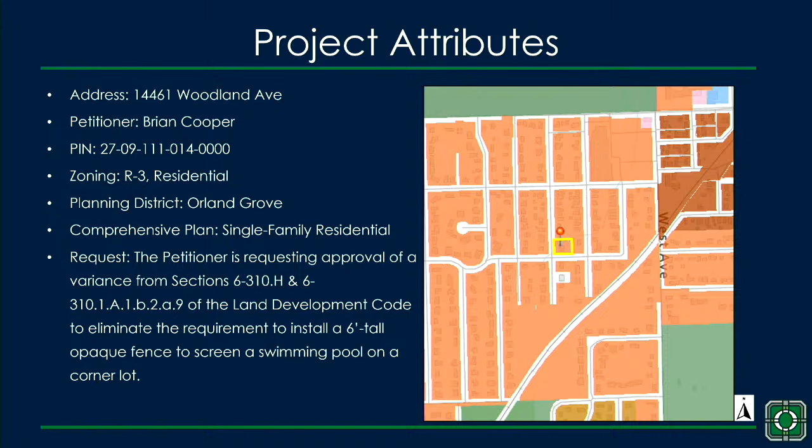The Cooper Residence Variance Project is a request to eliminate the requirement to install a 6-foot-tall opaque privacy fence to screen a swimming pool on a corner lot. The subject property is located at 14461 Woodland Avenue, within the R3 residential district, as indicated in orange on the map here. Under the comprehensive plan, this location falls under the Orland Grove Planning District with a land use designation of single-family residential.

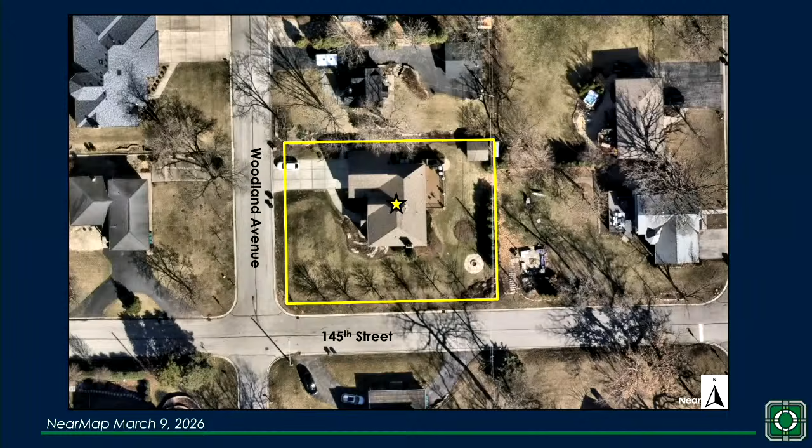Here's an aerial image of the subject property located on the northeast corner of Woodland Avenue and 145th Street. The petitioner has recently constructed a swimming pool in the rear yard of their property. Since this is a corner lot, the pool will be visible from the public right-of-way on 145th Street.

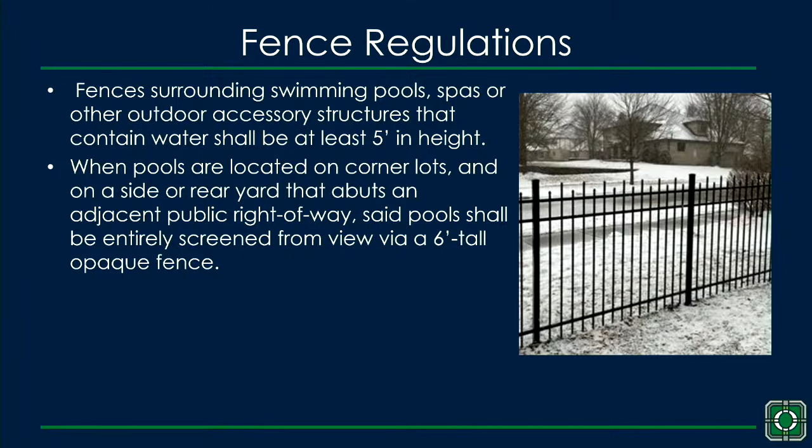As background, in 2021 the Land Development Code was amended to require a 6-foot-tall opaque fence to screen swimming pools located on corner lots. Swimming pools are permitted in side and/or rear yards of residential lots, and on corner lots the side and rear yards can be adjacent to a public right-of-way, making the pool more visible from the street. This requirement was implemented to screen the view of swimming pools from the public right-of-way.

The petitioner is requesting approval of a variance from the screening requirement, in which they propose to still install a 5-foot-tall open-style aluminum fence around their property in accordance with the swimming pool barrier requirements prescribed in the Land Development Code.

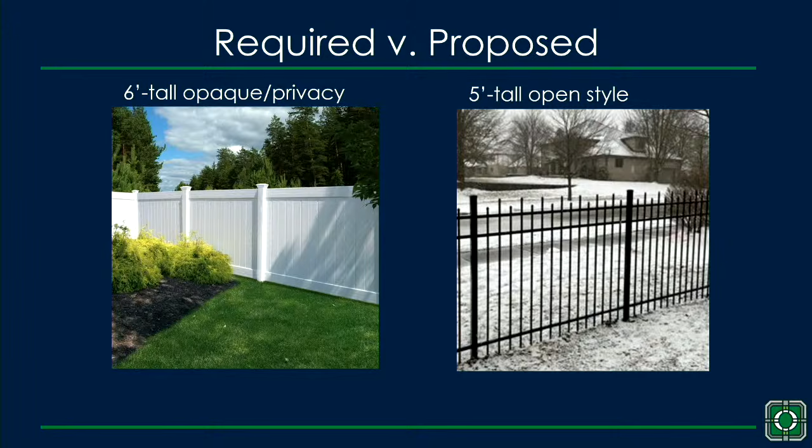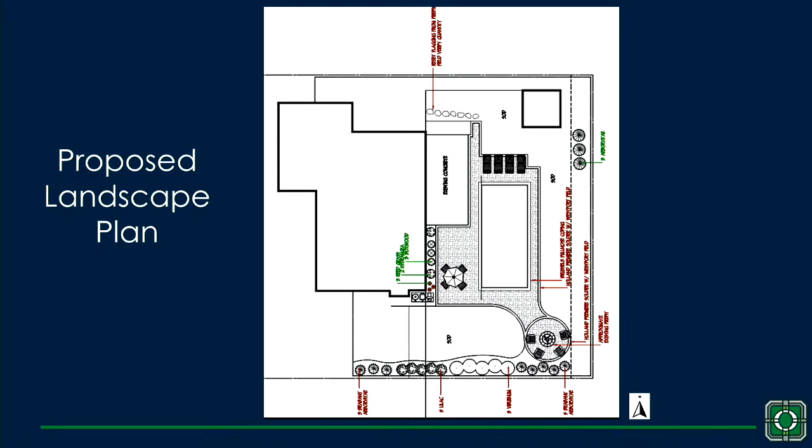As part of any variance request, the 10 variance standards must be met. The petitioner has responded to these standards, noting unique conditions to the property that make it difficult to meet code requirements, among other items as they discussed in their presentation. Their full responses to the standards are attached to the case file for reference.

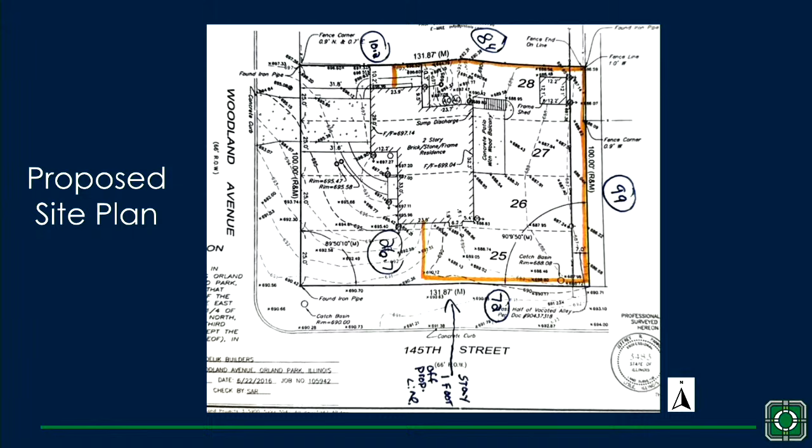And with regard to the opaque fence we're talking about, that would be only along 145th Street, correct? So the rest of the lot could be the other fence type, exactly. So it'd only be required along 145th Street and also the section connecting to their house on that side. Well, I'm very intimately acquainted with this particular lot and house. For 33 years I lived 4 blocks to the west, on the same corner. I had a northeast corner at 145th and Ridge. This is a northeast corner of 145th and Woodland.

The neighbor said that the picture shown from Google does not really adequately indicate the elevation difference adjacent to the property, and that's really true, you have to see it. There's a fairly steep hill that begins at Beacon Avenue, and you go one block to Highland, and the steepness continues from Highland to Woodland. So the Cooper lot is actually the low point at the bottom of that hill. Then that hill starts up a little bit as you go toward Rainey's Lane and Oakley and Woodland, or Westwood Drive.

Anyway, it seems there are 2 reasons we have these fence requirements. The first and most important is safety, and the fence complies with the safety requirement. The second requirement, added 6 years ago or whatever, is concerned just about aesthetics. So they meet the first requirement without a problem. With regard to aesthetics, they would have to install a fence probably 12 feet high to totally obscure the swimming pool from the street, which is ridiculous. So I have absolutely no problem with the request for variance.

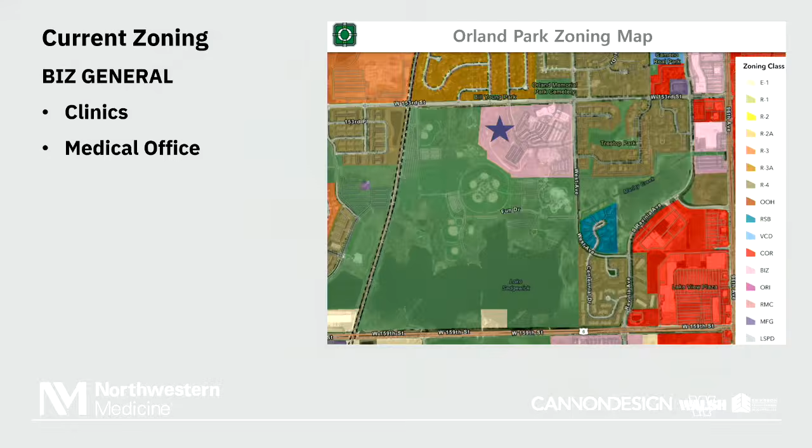Just a quick overview of where we are. Current zoning is business general, which is appropriate for medical office space. We're in the Orland Grove district. So just a high-level overview.

We're talking today a little bit about the site plan, some images of the building, talk about materiality, and then we'll transfer that to some of our civil team to talk about traffic, stormwater, and landscape. Our campus, you can see, the proposed building is just a little bit west of the existing Orland Park Northwestern campus and to the east of Centennial Park, just south of 153rd Street. We've situated the building the way it's located because we're nestled in between wetlands and some natural native wetland areas and landscaping that we're trying to preserve as part of this project.

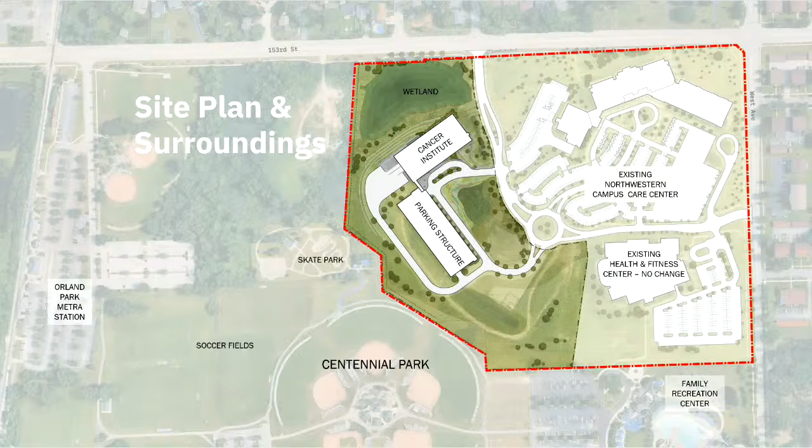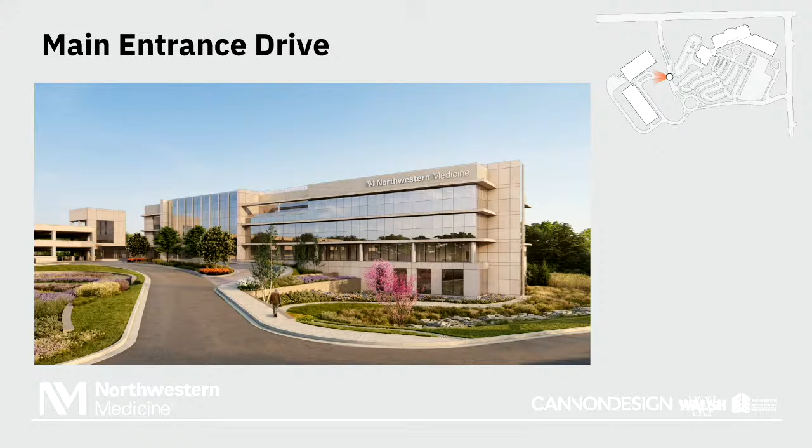So that's kind of where the building gets its shape and orientation. You can see from when you approach it from the south, we're trying to create a very welcoming destination look to the building - a lot of welcoming glass, along with some masonry and stone elements to balance the openness of the glass with some more solid things rooted to the community and anchored to the site. Borrowing from prairie aesthetics as well, with the strong horizontal lines and the brand of Northwestern, trying to merge all those things together. To the left, you can see the parking structure that's attached on the first story so that patients can come through a connected place into the parking structure without having to cross lanes of traffic.

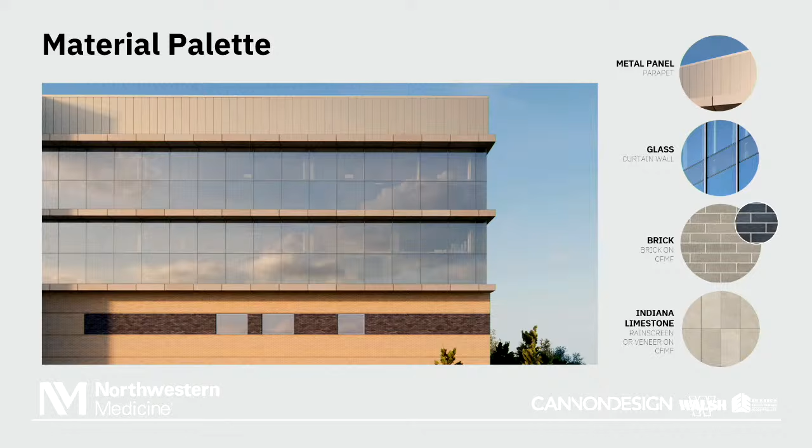The materiality we were discussing—we're using a lot of brick as well as Indiana limestone, so brick masonry is very prevalent throughout. We have the large glass curtain wall elements, which are aluminum and glass pieces, and then metal panels for the black area to screen the mechanical units on the roof.

Here's another view a little closer to the building. You can see a lot of the stone, a lot of the glass. That's the main view of the building with the stair tower, but we're trying to blend the heavy with the light and get a nice play and interchange of materials, as well as great landscaping in front of the building to help soften it into the landscape.

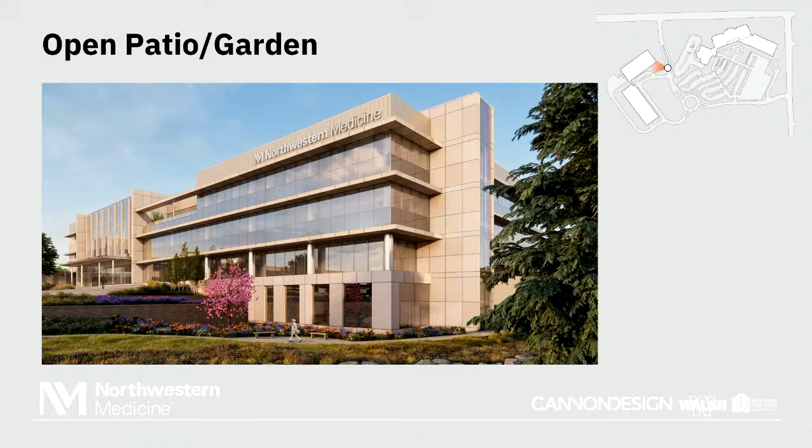Another view looking from the south along the edge of the parking structure—we're screening that with a lot of landscape elements to help soften it as well. And the detention space in front of the building, seen to the right, will be fully planted and look nice year round.

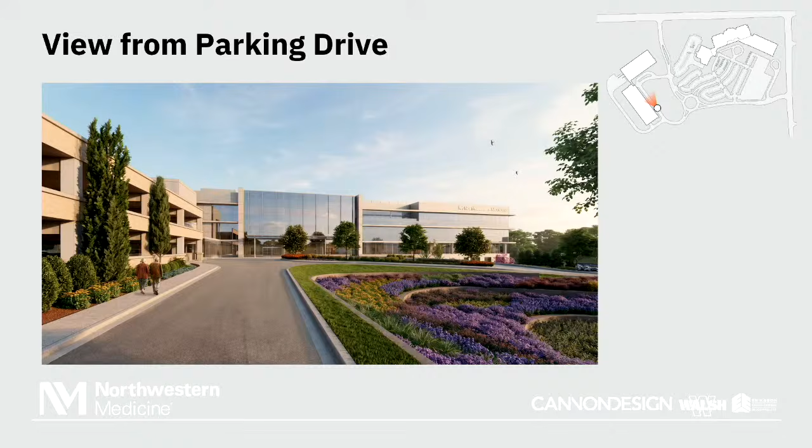This looks towards 153rd Street. The lower levels, to Dan's point about cutting edge technology, a lot of that space doesn't need windows because it's the radiation oncology spaces—big giant vaults that help protect patients and the public from radiation. So that's a lot of solid elements, all the brick masonry pieces. Above that, lighter—which you'll see from 153rd Street—is where the glass will be more translucent and transparent at night, so it'll glow like a beacon on the landscape.

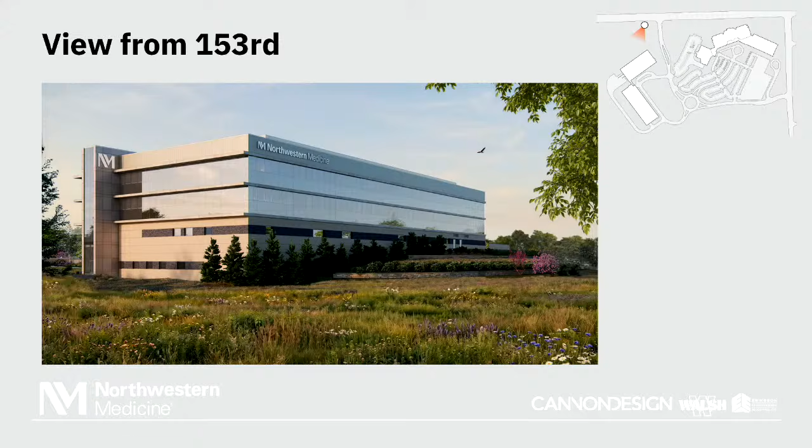Is that western view your parking lot? No, that's facing Centennial Park. That's kind of the service yard area. Yep.

So for the traffic access demo, I'm going to turn that over to our civil engineering friends.

Good evening, my name is Steve Corcoran, Director of Traffic Engineering at Eriksson Engineering Associates. We prepared a traffic and parking study that should be in your packet, but I'll give a very brief overview.

In terms of the campus, we're going to use the existing campus access off 153rd and West—that's going to remain the same, no major changes. We'll do a little restriping at the 153rd entrance to extend the left turn lane there, but we'll use that same entrance.

We'll have 2 access drives into the building area. One is from the roundabout—if you recall, at one point there was a temporary parking lot during reconstruction of the medical office complex; that was the south entrance. Now we're making that a formal south access into the parking garage area. We'll also have the main entrance, shown earlier, located opposite a driveway for the medical office building. So we'll have 2 ways in and out leading into the parking garage.

At the request of staff, for inbound traffic we're going to direct, with signage and through literature, our visitors to come in the 153rd Street entrance. In terms of parking, we have a 490 space parking garage that will serve both visitors and staff. That demand and supply figure was based on parking studies done at other cancer centers around the country.

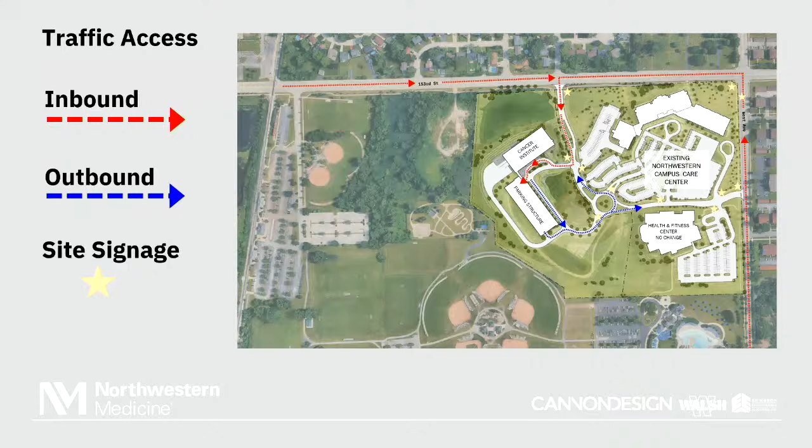And now I'll turn this over to Rick Sinnott to talk about stormwater. Good evening, my name is Rick Sinnott, S-I-N-N-O-T-T, with Erickson Engineering, and I'm the project civil engineer.

This site was somewhat of a challenge to grade—I'm sure you've seen it. It has a low area right off 153rd Street and a big hill just south of that. So our intent is to grade the site to provide stormwater management in accordance with the village and the MWRD requirements. We created a series of 3 detention ponds.

The first one, number 3 on that slide, is existing—it was built as part of the 2016 project. We're going to keep that, at least temporarily. It will probably be modified at some point in the future, when the area to the southeast of the roads is developed. There's no development plan for it now, but there could be in the future.

So Pond 3 could be enlarged at that time. Pond 3 is then tributary of Pond 2, which provides most of the stormwater management for the site.

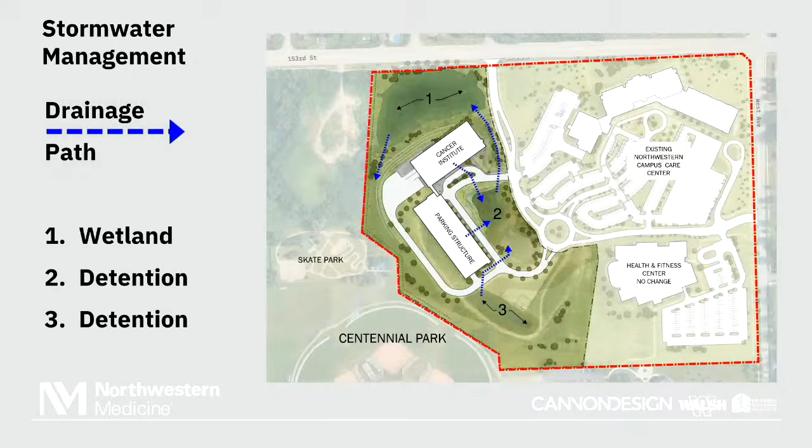We are in the process of applying for a permit from the county as requested by the village. The existing wetland encroaches onto 153rd Street, so there's a potential impact to the 153rd Street right-of-way. There's no impact to the street at all, but since that's the county's right-of-way, we have agreed to submit for a permit to the county.

This is an alternate if the county doesn't allow us to do the plan that we have designed. This first alternate would be to do some grading in the right-of-way to pull that wetland away from the right-of-way.

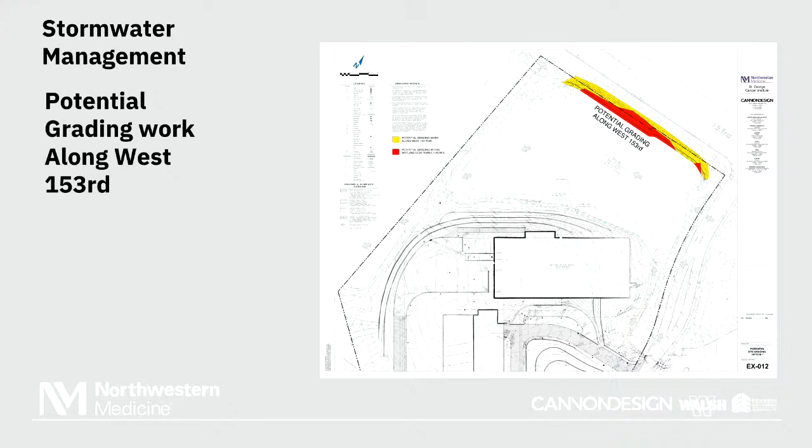And then there's a second alternate that if the county doesn't allow us to do that, we will take Pond 3 and enlarge that to provide the detention that we're not providing in Pond 2.

So that's the scheme, and I'll be available for questions. Thank you. Anybody else?

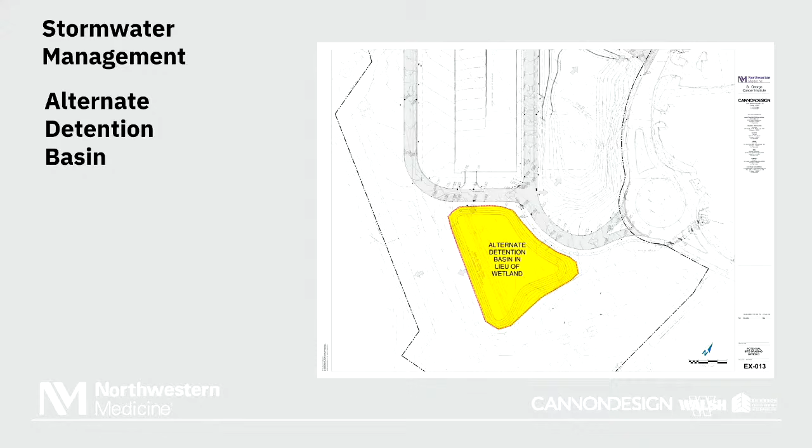Yes, hi, my name is Steve Gregory. I'm a landscape architect with Erickson Engineering, landscape architect for the project. We're super excited to get to work on this one because it's a pretty unique site, as Rick described, with the grading and the wetlands that exist there to the north.

Which we're going to be able to keep and basically enhance. We wanted to use that as kind of the framework for the planting and for the native plants and the introduction of low profile prairie for the bulk of the site.

There's a small perimeter around our paved areas where we have a low maintenance turf grass, just for a transition from the built environment to that more natural environment with the native plants. The basin bottom would be done with wet tolerant native plants.

All this would be governed by a monitoring and maintenance plan. We're currently working with staff to make sure we accommodate all those issues and items, so that we will have a monitoring and maintenance plan that's compliant with your ordinance.

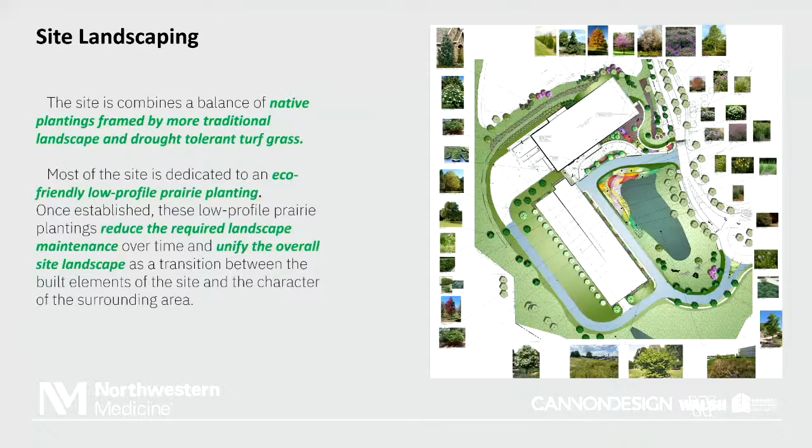Next slide. This kind of just shows you a little bit more in depth. That area that was in the renderings there on the right is the patio and garden, kind of nestled in up next to the building, offering a unique little setting there, surrounded by a pollinator garden.

Where we're going to introduce a bunch of native plants that would allow our staff and or any patrons to use this space to just relax and enjoy their time between shifts or whatever it might be, in a more natural setting.

Overlooking the dry creek that Rick had mentioned, that basically is a link between Pond 2 and Pond 3 -- Pond 1, I'm sorry, it's the other way around. Pond 1 is the native area coming from Pond 2, where all of our water goes first, part of the treatment train, and then would go through this dry creek area.

And that's done to kind of just stabilize that so we don't have erosion or anything else there. And then again, it will be framed with native plants that lead down into the native plants of the wetland area. I will be available for any questions, but that's pretty much our landscape plan in a nutshell.

Happy to answer any questions you might have as we move forward. Thank you for your time. Thank you, sir.

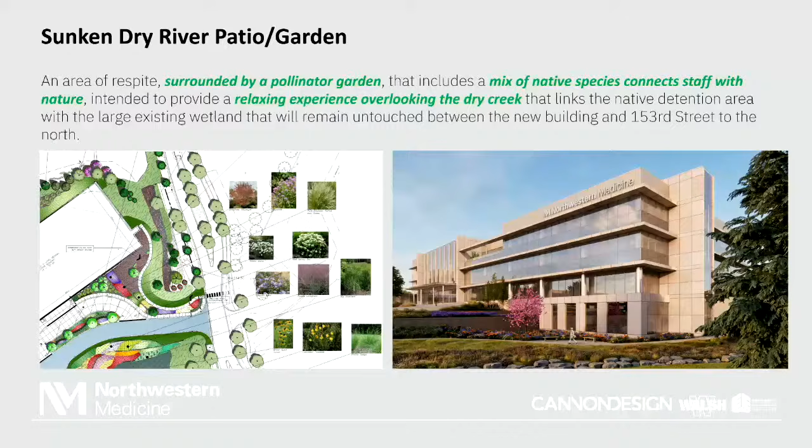Ryan Soderquist with Cannon Design. I'm the project architect for the project.

We do have a couple of special use permits and modifications that we are asking for the development, starting with the amendment to the existing PUD. On this screen, you'll see the 2016 plan, the last time the campus had a project, shown in dark gray on the left image. You can see where our lot is off to the left—it didn't include the entire property. So the amendment is to bring that lot 3 property into the PUD.

There are no modifications asked for the fitness center. The Village Fitness Center is on lot 2, and nothing we're asking for in the development would affect that. There's really one condition that Ms. Gorman will talk about, for an update to the current campus on Lot 1.

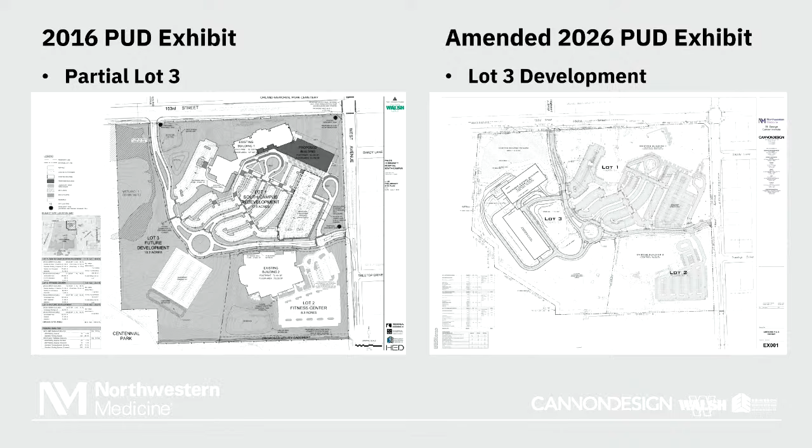The second special use is to have our building within 30 feet of the wetland. You can see a 50-foot, 30-foot delineation, and then the zero hatched area is the wetland. Essentially, the special use lets us align the building with the wetland, which lets us optimize the land and the footprint of the building.

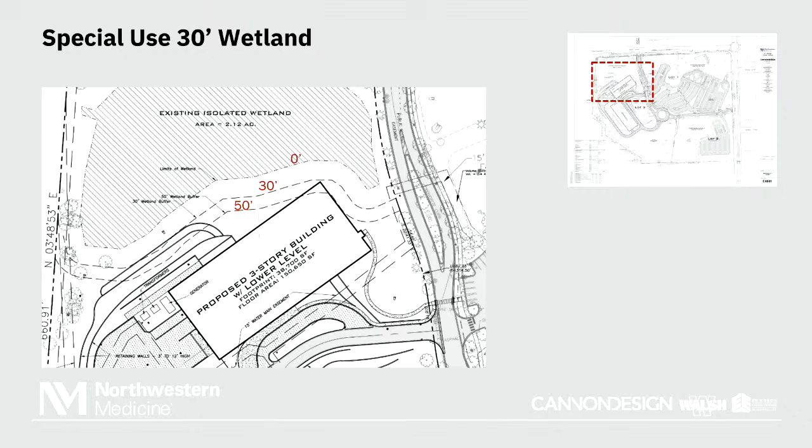Moving on to modifications: current ordinance allows a 4-story structure in the business district, which we are. The height limit is 50 feet. As Andy was mentioning, our first 2 floors are brick and have the heavy equipment, so the floor-to-floor heights for the linear accelerators and imaging equipment need to be a lot higher. We're really only asking for 1 foot 6 inches over that height limit, so we're keeping it as low as we can.

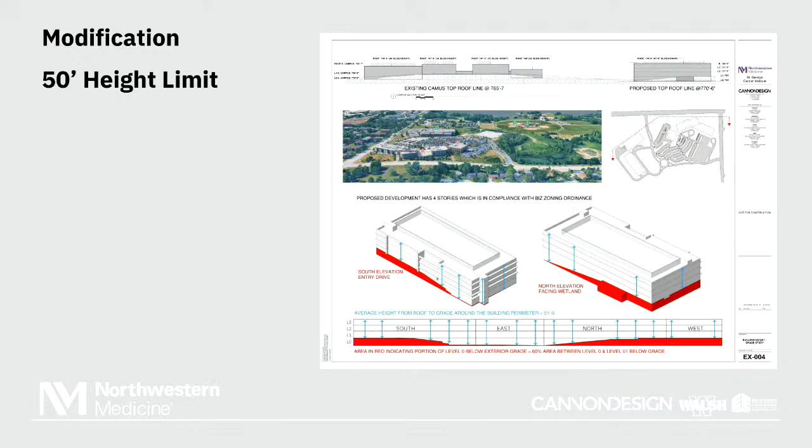But by noon, and then in the evening, at no time will the shadow of the building end up on 153rd. It will not go on the sidewalk on the south side of 153rd, and it will never reach the properties across to the north.

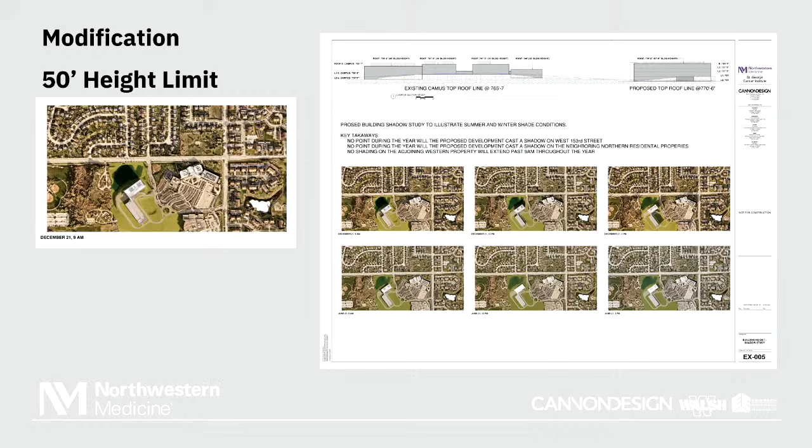We also have a modification regarding mechanical screening—the ordinance calls for a height limit of 10 feet, and we're requesting a 1-foot addition. This is because a lot of the equipment for imaging, the cooling units on the roof, are a little higher, and we don't want those visible from the road on 153rd. So it's a slight 1-foot increase to ensure we're screening all the mechanical units on the roof.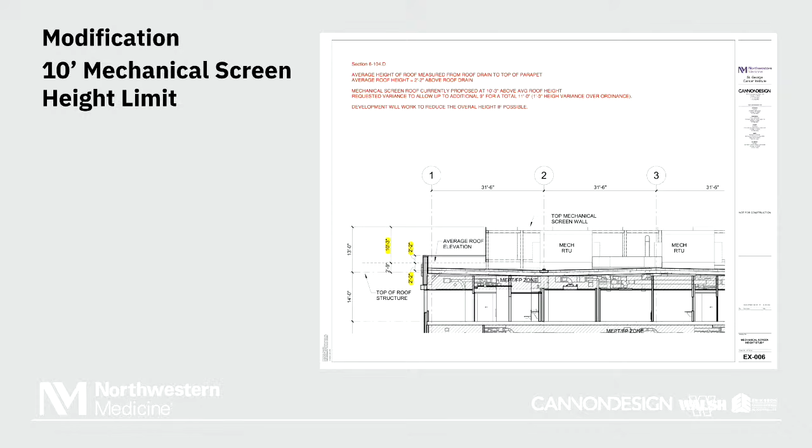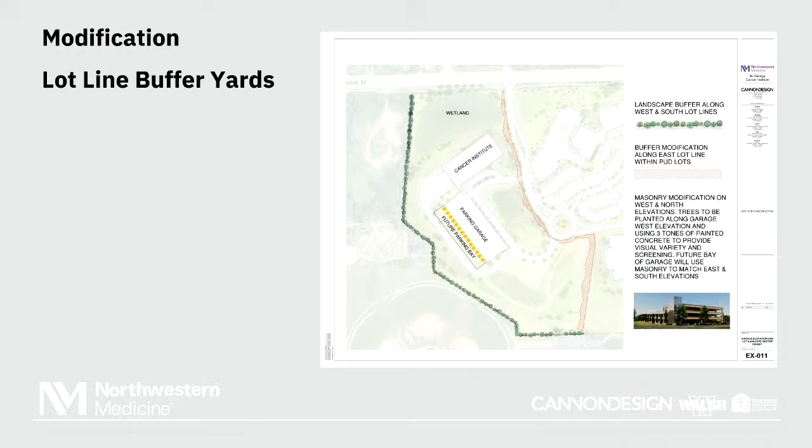So then the last modification I have to talk about is on our parking garage. The ordinance calls out for masonry on all four sides of the buildings. As Andy had shown with the Cancer Center, we do have a lot of masonry. We have Indiana limestone as accents that comply fully with the spirit of the ordinance. We are on the east and south side of the garage, we're going to have brick inlay and concrete panels, so the masonry ordinance does comply on those two.

However, as I mentioned, we're leaving some space in lot 3 for future development, a future bay to be added onto that parking garage. So the request for the modification is that, in lieu of having brick on the west and north facade of the garage day one, we would do landscaping and a painted concrete in an assortment of colors to give it some variety and not just be plain, as it will be seen from Centennial Park. But we will do fast-growing trees to provide some screening.

We also have the buffer that's going to be between Centennial Park and our building. Then at a future date, when that extra bay of parking gets built, we would go back and do the matching brick all the way around. So in the short term, we're doing our best to come up with something visually appealing for the community, but in the long term it will all come under the ordinance.

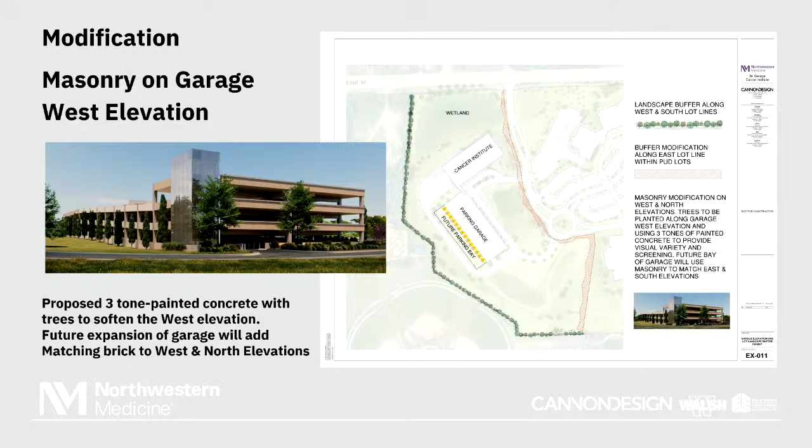So with that, I will hand it back to Dan. Well, thank you for that detailed explanation. Thanks, Ryan. We're almost done, I promise.

The last thing we're going to touch on is economic and community benefits. The expansion of cancer care and treatment in Orland Park, we talked about that, not just for the community, but it being a destination in the Midwest and even nationally, we really believe it's going to be bringing people and business to the area.

Approximately 150 new jobs are what we're estimating generating in the facility. That's not moving people from one place to the next, that's 150 new jobs created. And at any given time, we think we're going to have 350 construction jobs generated for the 2+ years we're going to be here, looking to open this in mid-2029.

Landscape enhancements that we just talked about, it doesn't even do it justice just to see it, but it's going to be beautiful, a gorgeous facility. And then preservation of the existing wetlands already there, and overall beautification of the Orland Park campus, which already is a beautiful modern campus. So priority for open spaces versus parking lots as well, that's why we have the parking deck, and we're going to have as much open space as we can.

In a nutshell, we think it's going to be great for your community, and we thank you for your time this evening, and definitely open it up for questions. I'm sure you have a lot. Thank you for your time.

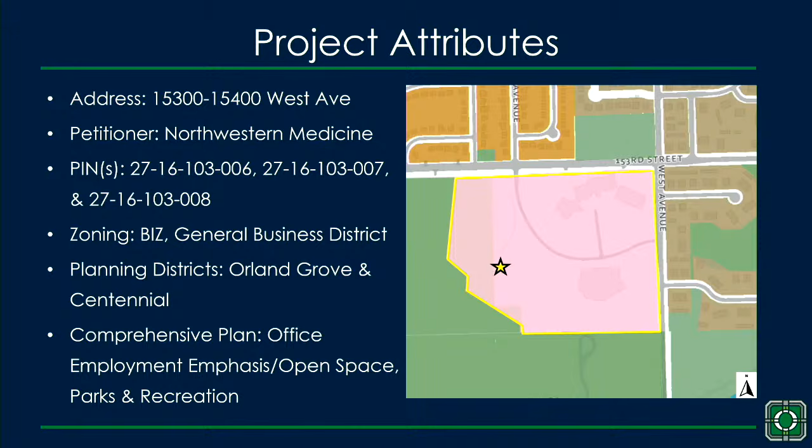I'll keep it a bit more brief since our petitioner had such a thorough presentation. I'll go over our requested approvals again. Here's the full list: it includes an amendment to a special use permit for a planned development with modifications, a special use permit for development within 50 feet of a non-tidal wetland with modifications, and approval of their site plan, landscape plan, and building elevations. I'll go into more detail with their modification requests throughout the presentation.

I'd also like to note that the Palos Health and Fitness Center will not be impacted by this proposal. The proposed development would occur entirely on the vacant parcel of land adjacent to the center.

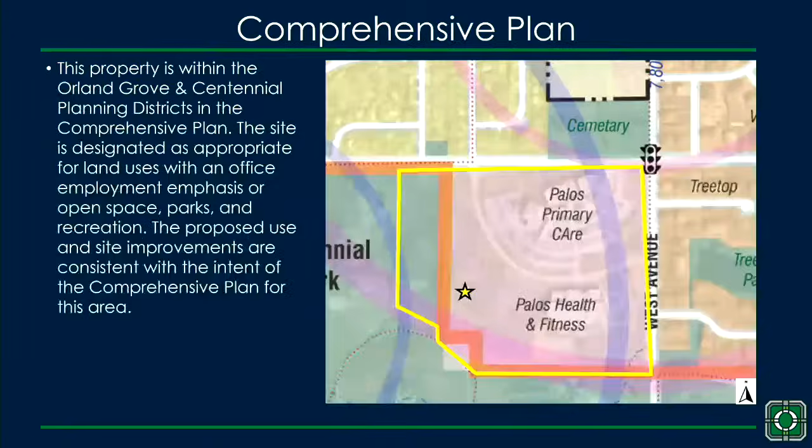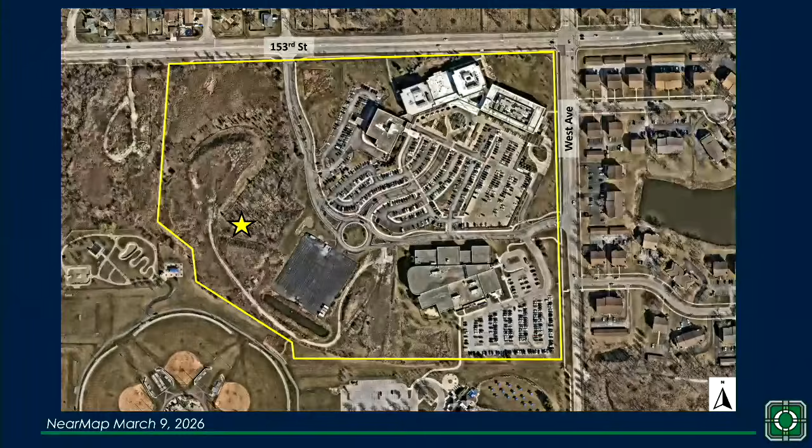This is an aerial image of the subject property and surrounding area, and the yellow outline indicates the entire boundary of the planned development, known as the Palos Community Hospital Planned Development. This includes the existing medical offices for Northwestern Medicine and the Palos Health and Fitness Center.

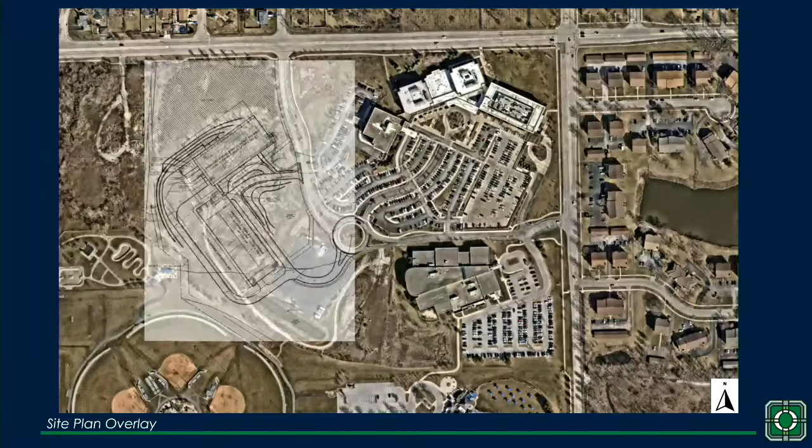Here's the proposed site plan overlaid onto the aerial, just to demonstrate the location of the development relative to the existing buildings. Moving forward, here is their proposed site plan. As discussed, this will be a 3-story, 150,650 square foot medical office building, accompanied by a 4-level parking structure.

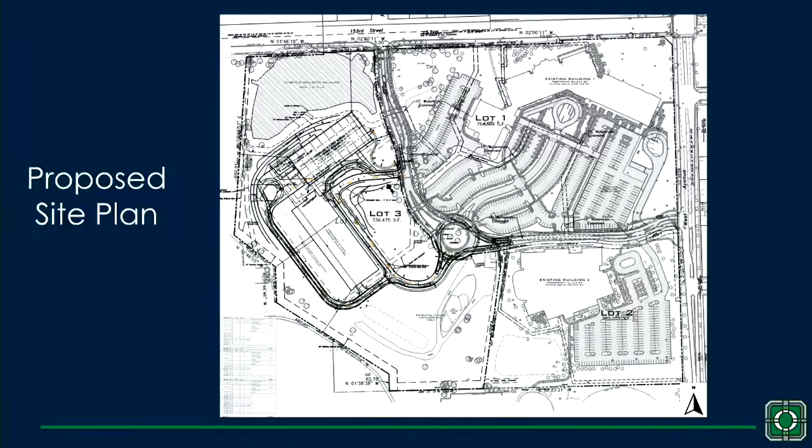There's approximately 2 acres of wetland on the north side of the property, proposed to be utilized as stormwater detention for the development. Overall, the site plan meets land development code requirements regarding setbacks and lot coverage. The proposed lot coverage is approximately 49%, which is far below the maximum of 75% allowed for this district.

The parking for the site will be accommodated within the new parking structure, proposed for a total of 490 parking spaces, including 10 accessible spaces. However, 753 spaces are required by code. So parking will be shared among all uses within the planned development, as demonstrated in this table shown on the slide, as well as within the staff report. The shared parking lowers the deficit in parking below the 20% threshold warranted for administrative relief, so the parking requirement has been considered to be met by staff.

The code requires that a public sidewalk be installed on both sides of private streets. The petitioner has stated that the existing wetland on site makes it difficult to meet the sidewalk requirement, as this would require the wetland to be disturbed. There are also existing trees that the petitioner would like to preserve, which would have needed to be removed to accommodate a sidewalk. So the village has been working with the petitioner to address this requirement, and staff is recommending a condition of approval that the sidewalk be installed at the time of future development on the site.

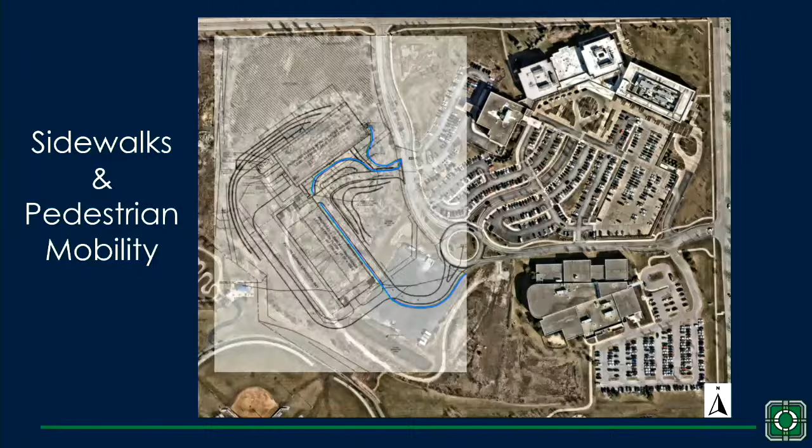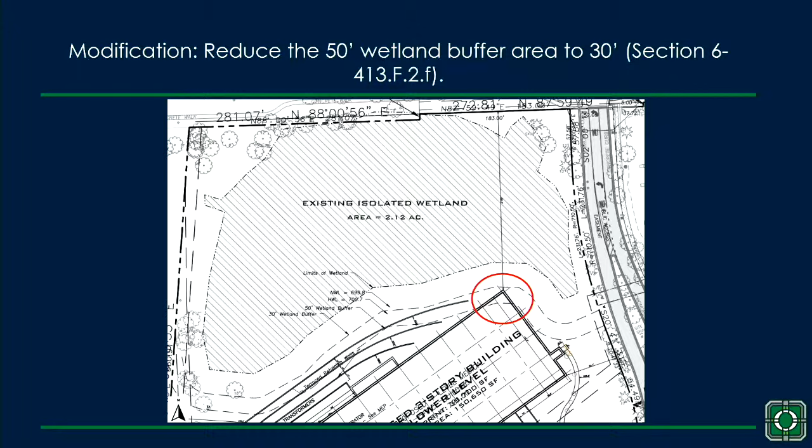Due to the proximity of the wetland, a special use permit for development within 50 feet of the wetland is required, and the petitioner has further requested a modification from the code to reduce the required 50-foot buffer to 30 feet, as the northeast corner of the medical office structure encroaches into the required 50-foot buffer, as shown in this image. Staff is in support of this request due to the minimal impact.

The preliminary landscape plan has been reviewed by the village's landscaping consultant. The plan has been conditionally approved at this time, with staff recommending conditions of approval for landscaping to be addressed prior to the petition advancing to the Board of Trustees. These items include stormwater management area landscape, the west and south landscape buffer yards, a monitoring and management plan, and landscape cost estimate.

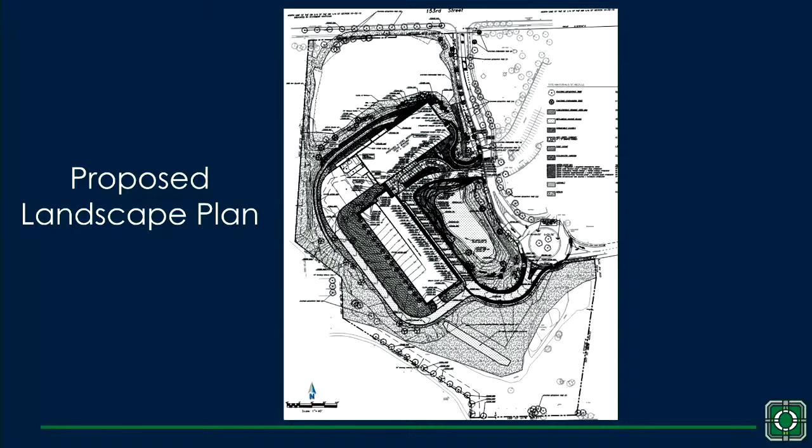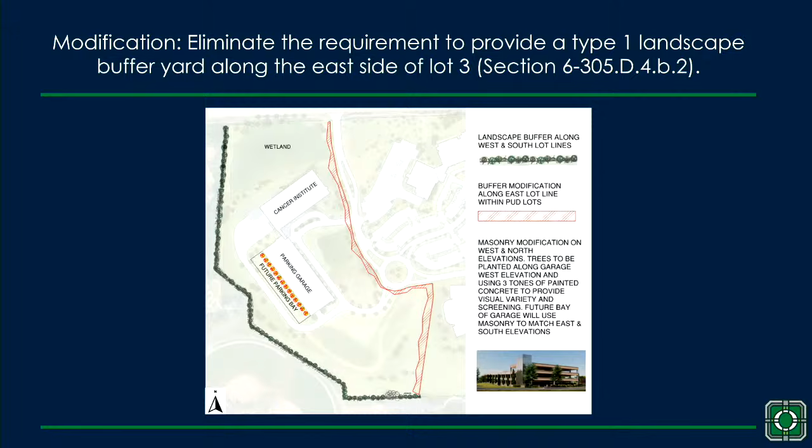As the petitioner discussed during their presentation, they're requesting a modification from the requirement to provide a landscape buffer yard along the east side of the subject property. The justification is that the property line is adjacent to uses within the planned development. The intent of the buffer yard requirement is to provide a separation from adjacent land uses. Since these properties are within the planned development, staff is in support of the request on the east buffer yard. However, we are recommending a condition that the buffer yards be provided along the west and south property lines.

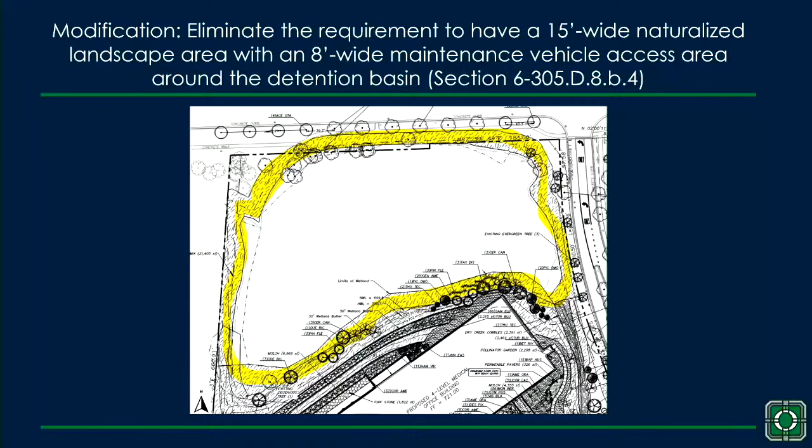They have also requested a modification to eliminate the requirement to provide a 15-foot wide naturalized landscape area with an 8-foot wide maintenance vehicle access area around the detention basin. They've noted a couple of different reasons for this request, and ultimately staff is in support of the request, provided that additional information is submitted for further review about how the detention area will be accessed for regular maintenance without the required 8-foot wide access.

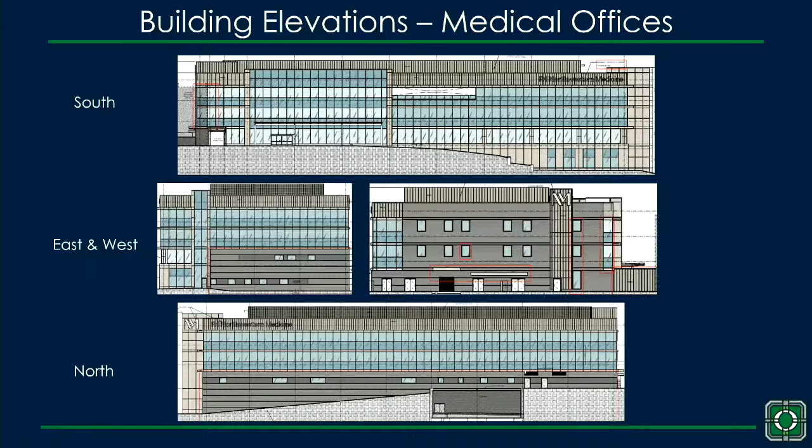Moving on to the building elevations, the design of the building for the St. George Cancer Institute is consistent with that of the existing medical campus and also consistent with other developments of this size. They're utilizing anchored brick, stone, or similar masonry materials to extend from the adjacent grade to the top of the window, highest on the subject facade, with minor accents in place of the masonry. The village encourages four-sided architecture, and the proposed design meets this intent by utilizing consistent design elements and building materials on all four elevations. The proposed materials are a mixture of brick, metal panels, and limestone, as well as glass.

The medical office building is proposed to exceed the maximum height requirement by 1 foot 6 inches, so they've requested a modification from this height requirement. They submitted a sightline exhibit and elevation exhibit to demonstrate the height of the new building relative to existing buildings within the planned development. Due to the difference in elevation, the height of the building will be very similar to the existing, as they've discussed during their presentation. So staff is in support of this request.

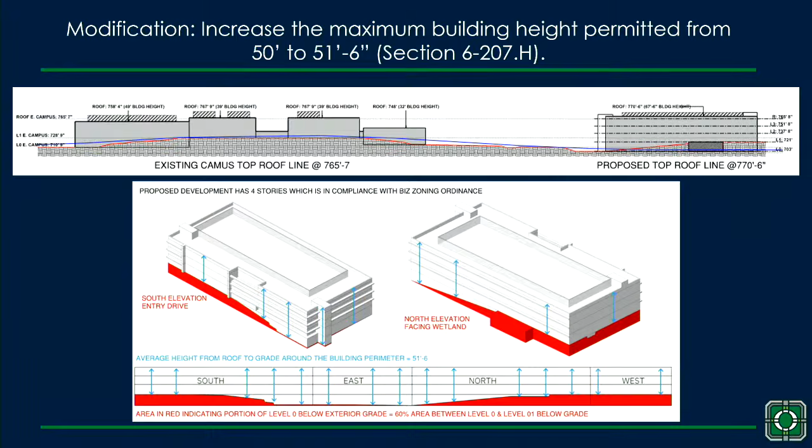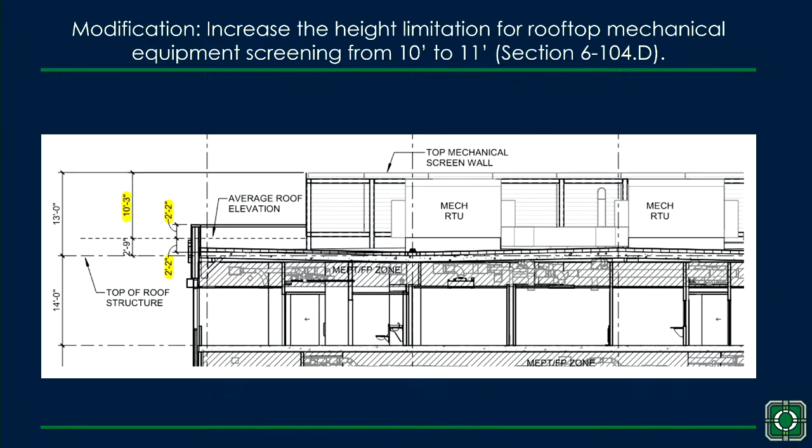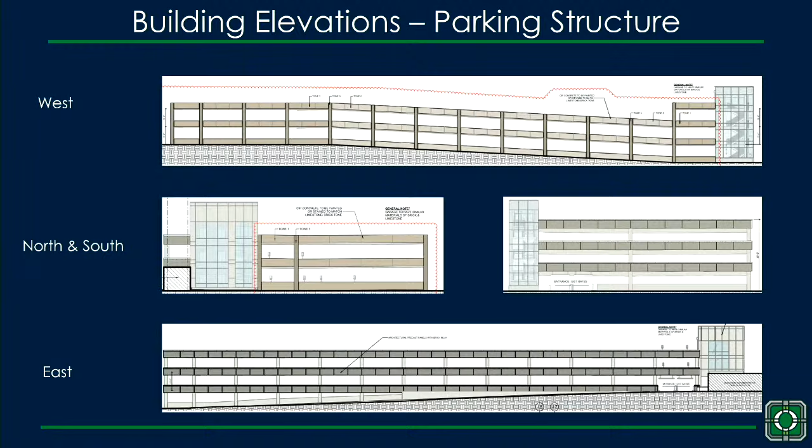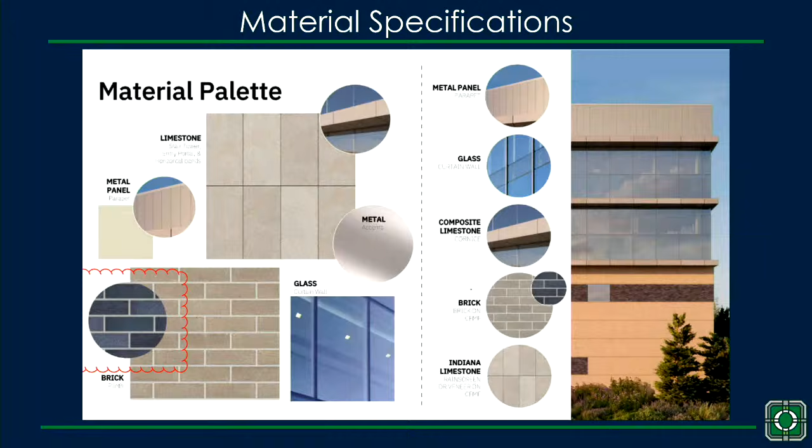Here's a closer image to demonstrate the materials proposed for the structure. I won't spend too much time on the renderings, as the petitioner had discussed these in more detail.

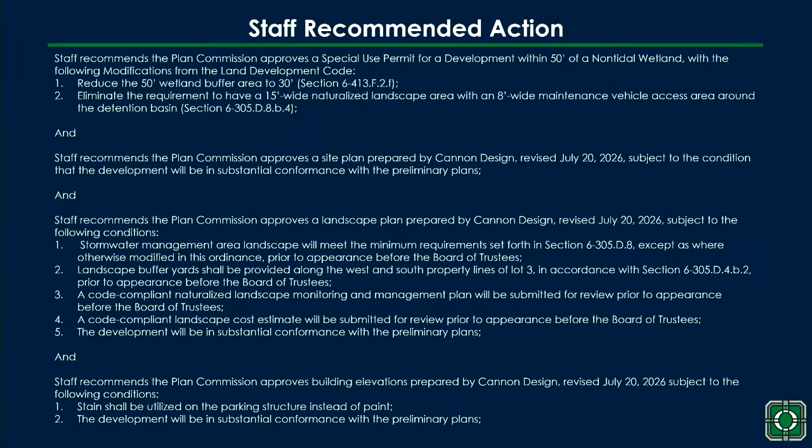With that in mind, here is the staff recommended action. It's also split up into multiple slides, just to try and make it as clear as possible, just because there's so much in the action. And then here's the staff recommended motion, and this concludes the staff presentation.

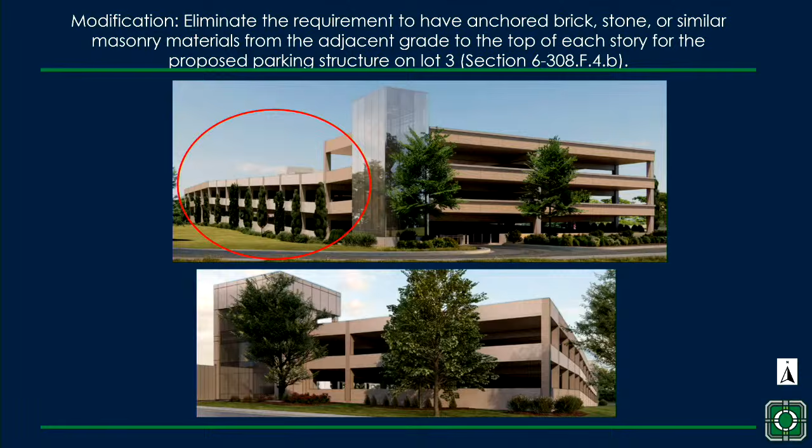Okay, I understand that, but the area right now, which is undeveloped, will be developed with baseball fields or soccer fields or something, and it'll be pretty close to the lot line. So where you're looking at the baseball field now, that's no problem, but there'll be something closer to the building once it's developed. Understood, and that's what I would be concerned about, that we have an ugly, not very attractive side to a parking garage to look at from a public park.

Okay, so whatever you design, whatever you build, in the end needs to be functional. I don't have a lot of problems with what you're proposing for Lot 3. I do have some problems with your existing configuration of the road network and the parking for the existing buildings there.

And specifically, what I'm concerned about is there's only two ways into this site. One is off 153rd, as you know, and the other one, that road winds around, takes a 90-degree turn, and ends up at West Avenue. The driveway on 153rd, the curb cut there, it's difficult to get out because the traffic on your right is coming down a fairly steep hill. People accelerate to get to the top of the hill, and then they come zipping down that hill. So you really have to be careful.

I've lived in Orland Park a long time, since 1972. And I'm at this facility a lot now lately because my wife is confined to a wheelchair and we have a lot of reasons to be there. And I have a handicap van that I have to deal with. That's one of the other things I want to talk to you about in a minute, about the parking spaces for handicap. But staying on driveways...